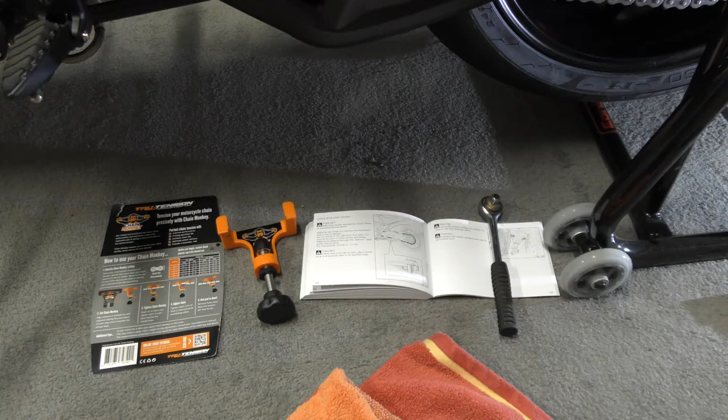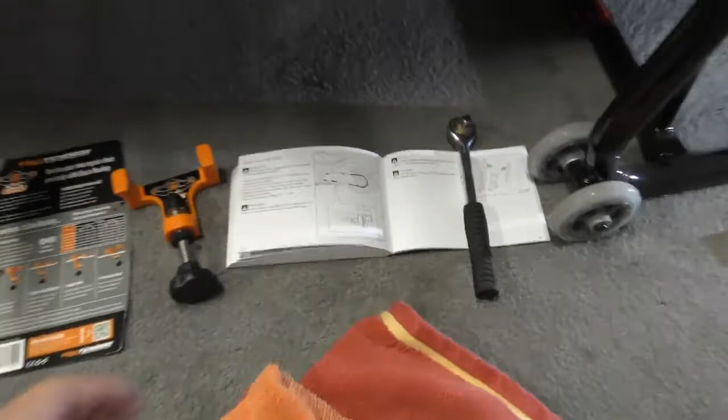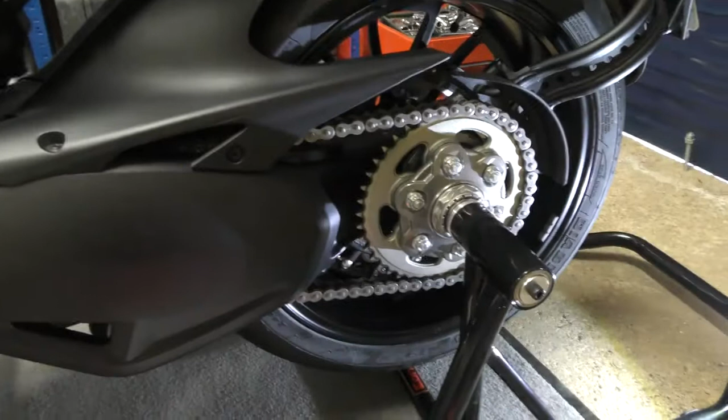Hey guys, so we've done about 54 miles and the chain is slack, so I thought we'd get the little Ducati instruction book out and just read up on how to adjust the chain. It's on an eccentric these days rather than the old swing arm style from my days where you just loosened the axle bolt and spindle and just adjusted each side to pull the whole wheel back.

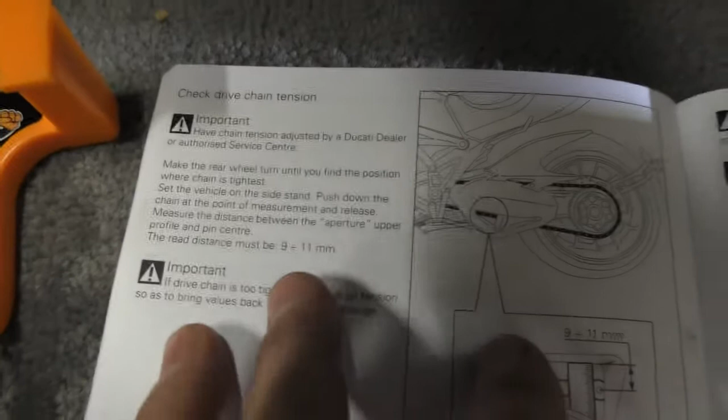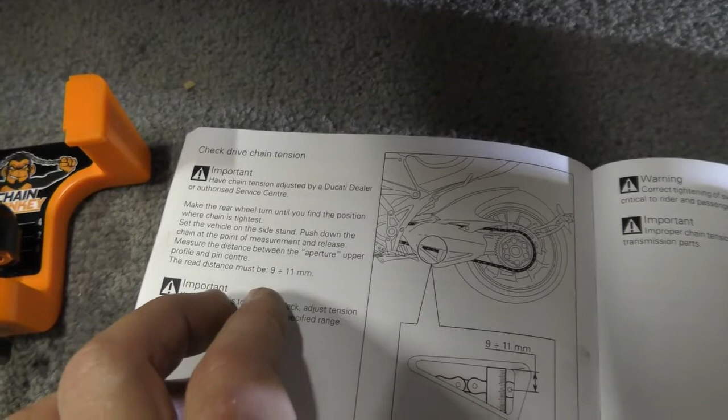And yeah, not quite as simple as I was hoping, but strangely they tell you in the book that you should have the chain adjusted by a Ducati dealer, and obviously find the tightest point of the chain by spinning the wheel around, and the distance between the top of the triangle cutout, which is just here, and the centre pin is 9 to 11 mil. So it's pretty much the centre of the pin to the top of the cutout, 9 to 11 mil, which is great.

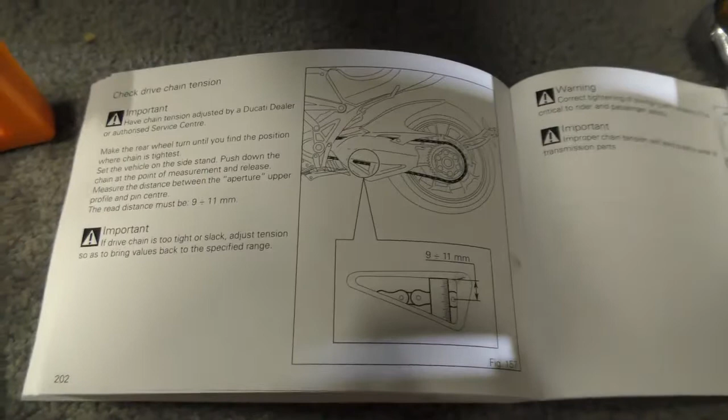Mine wasn't, it was much slacker than that. And then they don't tell you how to adjust it. So what sort of book is that? This is the owner's manual, and they don't tell you how to adjust the chain. I mean, how bloody stupid can you get? So they think I'm going to drive over to the local Ducati dealer of 54 miles to find out how to adjust the chain. Ridiculous.

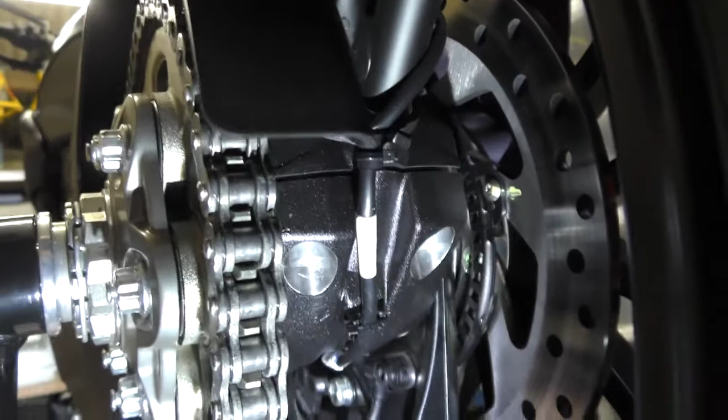Anyway, quick look on YouTube, and there are two. I'm just going to try and do this. Let's get the light in here. So you can see there, 1, 2, these are 10 mil hex bolts, and they need to be loosened off, very loose. Get them really loose, and then we'll look through the sprocket here. You will see, if I can get the light just right, a tooth.

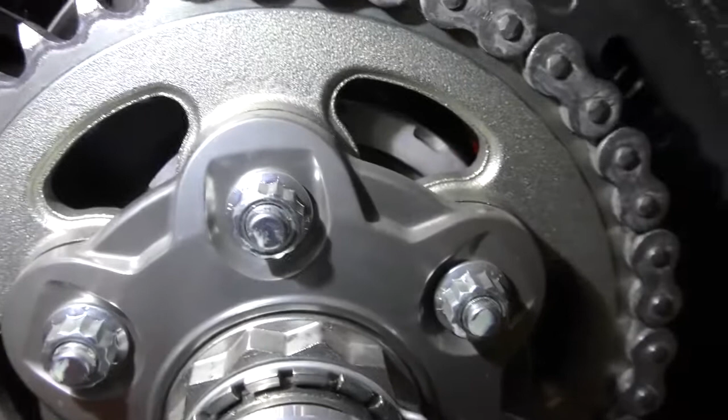It's basically an adjustment sprocket. You can see the tooth cut out. Just going to take the light away and point it out just in there. I don't think we'll be able to see it very easily. Like this. I don't know whether you can see that or not, but it's basically that ring just behind the sprocket. You need to rotate it. No doubt there is a special Ducati tool like a C spanner for adjusting that, but I've had to stick a screwdriver in.

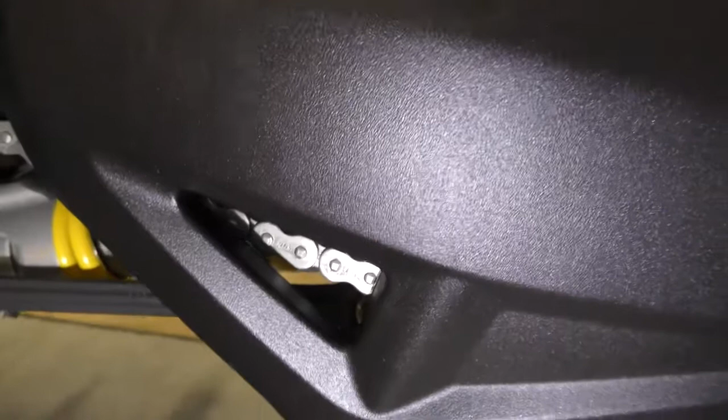There you can see the adjustment through there. You can see that tooth cut out. I've literally had to get a flat bladed screwdriver in there and give it a tap with a hammer and monitor the tension through here. And although the adjustment is supposed to be done with the side stand down, that's not exactly convenient because the bike's leant right over and makes the whole thing a little bit harder.

The guys on YouTube that I've seen say doing it on a paddock stand makes absolutely no difference, and we're going to find out in a minute when the bike is put on the side stand. We'll check the measurements again. But yeah, fancy not telling you how to adjust the chain in a user's manual. It's not like it's a twice a year setting.

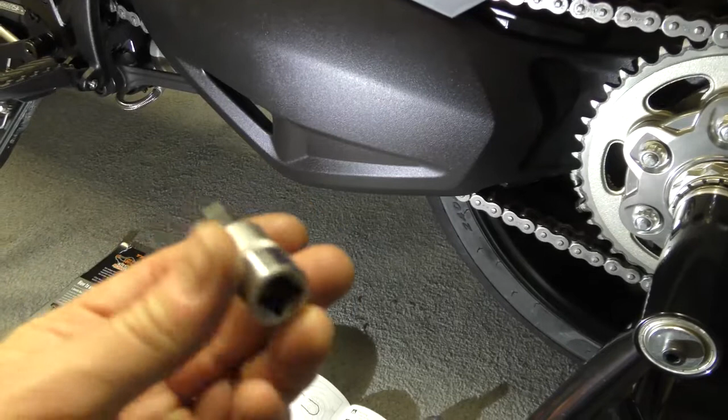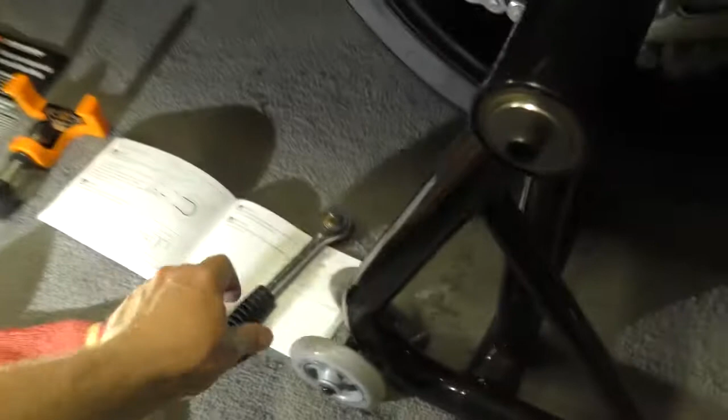But anyway, once you've got the adjustment correct, you can go ahead and just nip up those two 10 mil hex bolts. You've got no chance of doing it with a hex wrench. You will need to buy a hex bit for your socket set. In this case it was a 1/2 inch, so you can use whatever wrenches and adapters are required.

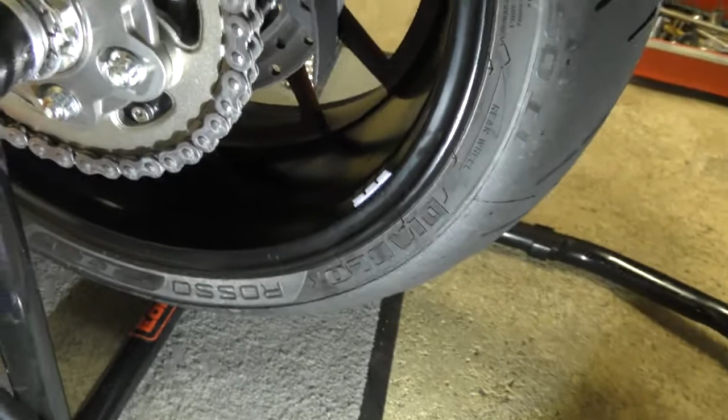A couple of tips: make sure you cover the wheel. Pop something over the wheel because it's very likely you're going to drop the wrench or the bit, or just ding the edge around here with something. I used a quite short wrench and can just get in there without doing any harm.

So that was that. I did also buy the chain monkey. This was from Amazon, as pretty much everything is that I buy these days. The only issue is, if you look at the adjustment range, we have on the Diavel a 15mm chain, so it's this box here. The adjustment, as I said, was 9 to 11mm, but the zero setting is for 13 to 24.

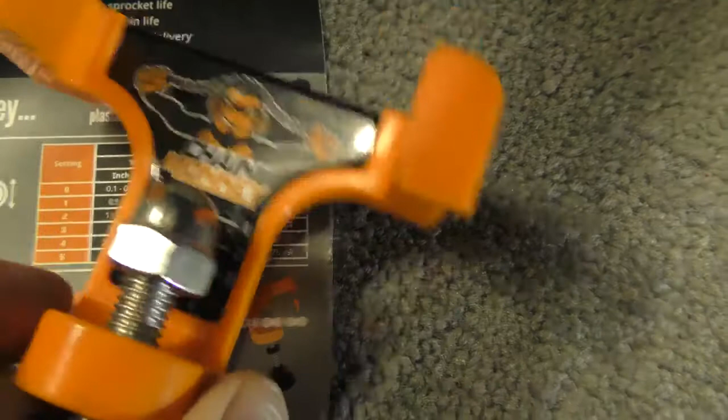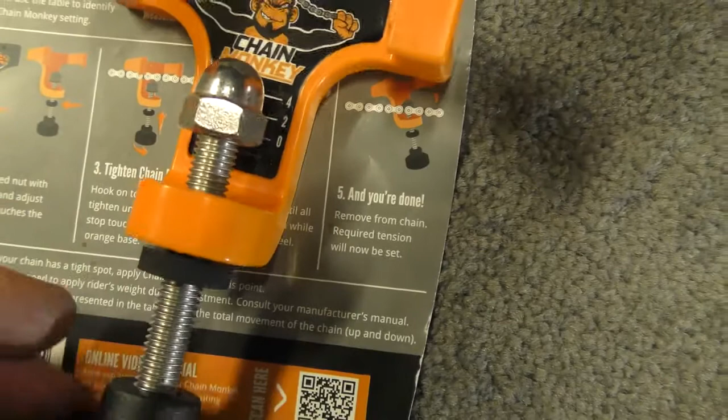So what you do is line up the bottom of that nut with the markings on the chain monkey, but because it starts at too great a distance, you've kind of got to guess a bit as to where that nut needs to be, and I suspect the best way is to just do it by hand once, and then adjust the chain monkey to suit what you've just adjusted, and you set that position by moving this rubber washer. It's a little bit tricky with one hand and a bit of grease on my fingers.

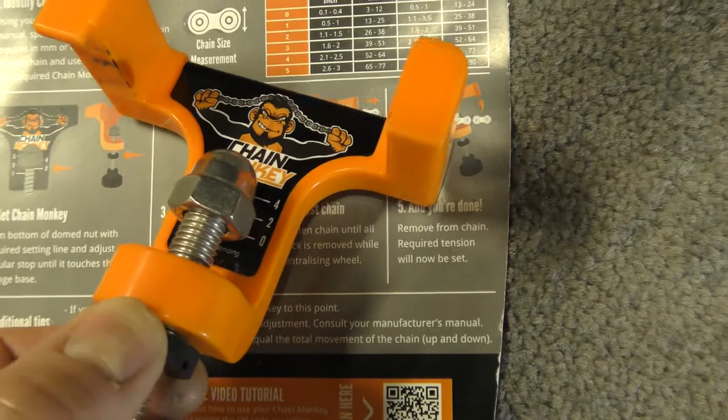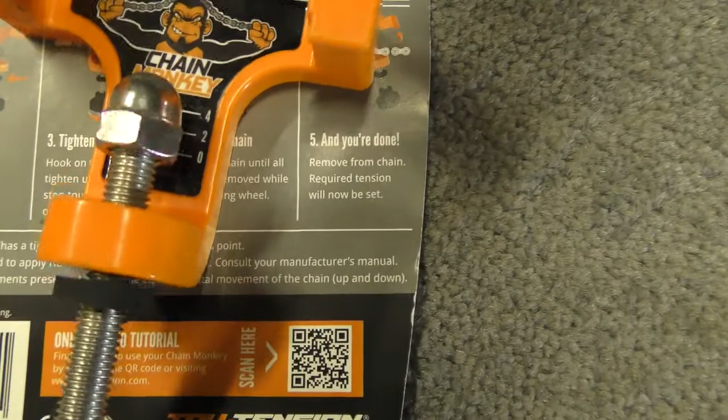So you would position the nut in the correct place, and once that's correct, just tighten that up. So the next time you use it, the chain monkey will just go in there and hook over the chain. It's a bit tight, and the centre of a link needs to be sat on top there, but you can actually use this. It will go in just.

You've got to watch that this is not hitting the cover. Oh, it's not a cover, it's an integral part of the frame. It's metal, it's not plastic, so it can just start to hit under here as you do it up, but you can use it. But to be honest, sliding in a steel rule also goes in here, and that might be easier. You just need to pull down on the chain, let it go, and then measure the centre of the pin to the top, and 9 to 11mm.

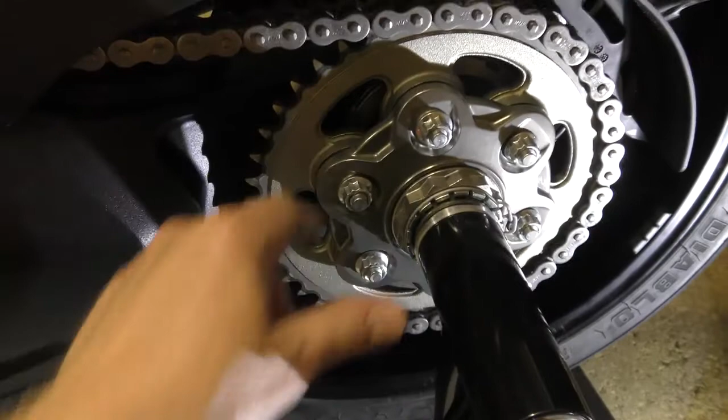I've got it on a slightly slacker part of the chain at the moment, because I've spun the wheel around cleaning that rear wheel up. So pretty straightforward. I'm going to have to see what special tool is available, because you are definitely going to be damaging the little teeth in here by whacking it with a hammer. You can see one in there and another one in there.

So there's got to be some sort of C-spanner that will go in there that makes it easier, so we'll have to do a little search for one of those. So it's just a matter of a little bit of lube on there now, and we're good to go again for a little bit longer.

Should have been riding and recording today, but it's raining, and I've got no intentions of taking this out in the rain at all. So anyway, that's just a quick look at the chain adjustment on this 2016 Diavel. Would have been nice if it was in the manual, but it's fairly straightforward to work out.